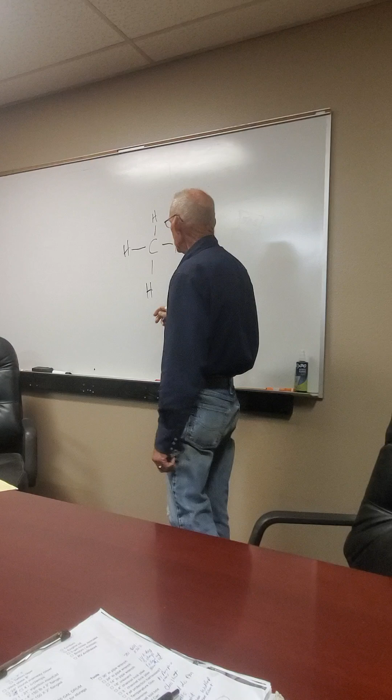Okay, atoms make up molecules, and molecules make up matter. So a methane molecule is carbon and hydrogen. Hydrocarbon is nothing more than carbon atoms and hydrogen atoms. So this right here is a methane molecule, it's made up of 5 atoms.

That's the lightest gas. So crude oil makes up molecules of lots of different types of hydrocarbon. As we get into butane - so this, in chemistry, is CH4, 1 carbon atom and 4 hydrogen atoms.

Butane, what is butane? Butane is C4H10, so it's 4 carbon atoms with 10 hydrogen atoms.

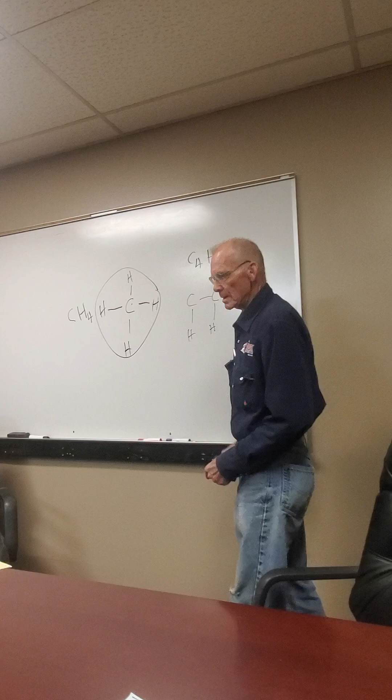Then as we get into heavier hydrocarbon, those molecules get larger, and they're made up of more carbon and more hydrogen. You get into asphalt and bitumen - I think they call it bitumen because it's a bitch.

Molecules for asphalt and bitumen are like a honeycomb. They're like a honeycomb. And they can be bonded, double bonded, and triple bonded. So the hydrogen, it's tighter. And that asphalt, the molecules get real long and large and hard to break up.

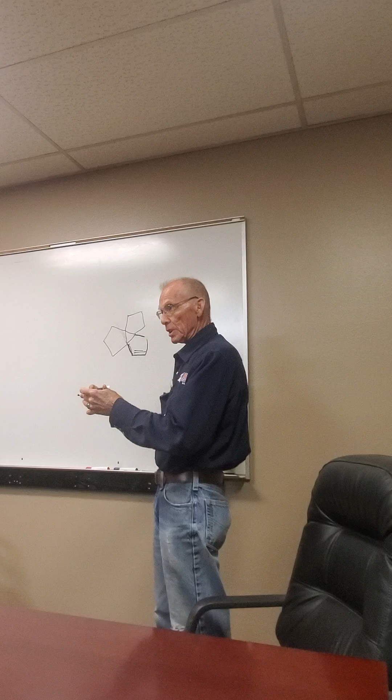We can't - this process diffuses molecules, it'll separate molecules. So you dilute them and make it easier to handle. It's like you can put the chemistry in asphalt and it'll make it more runny, like water. So it diffuses the molecules, separates the molecules. It doesn't change the molecule, it just separates them.

Because bitumen and asphalt could cover this whole board in a honeycomb, and the asphalt and bitumen has metals in it, all kinds of metals. It'll contain nitrogen, sulfur, oxygen, nickel, vanadium, rhodium - all those metals that come from deep in the earth. So that all bonds it together, bonds those molecules tightly together, and they're hard to separate, to dilute, so we can easily clean and handle it.

So that's as far as I'm gonna go on the chemistry, because now you understand that molecules of the hydrocarbons are bonded together tightly, and this process separates them to where we can handle them and get rid of them.

While you're drawing that, Ron - so what you're saying is the chemistry that you're injecting into that steam touches these chemicals and pulls them apart into little pieces that can then flow out, they just kind of melt away. Yeah, it's like...

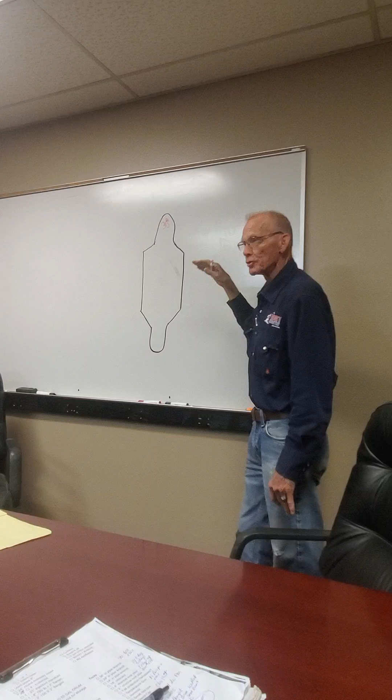And the crude oil comes into the fractionator - it's what's called the flash zone, and that's just a vapor space, there's no liquid level there, it's just an empty space at 720 degrees. Crude oil at 720 degrees enters that tower.

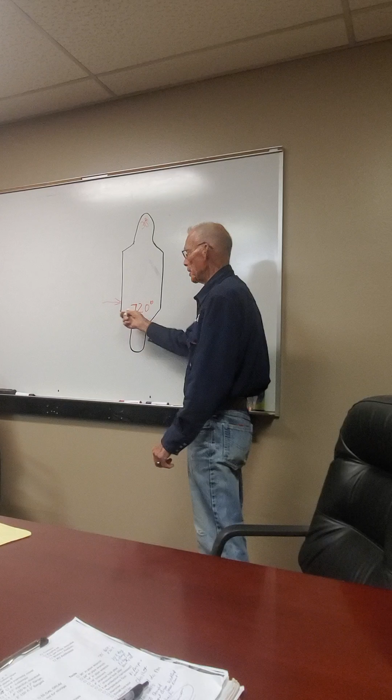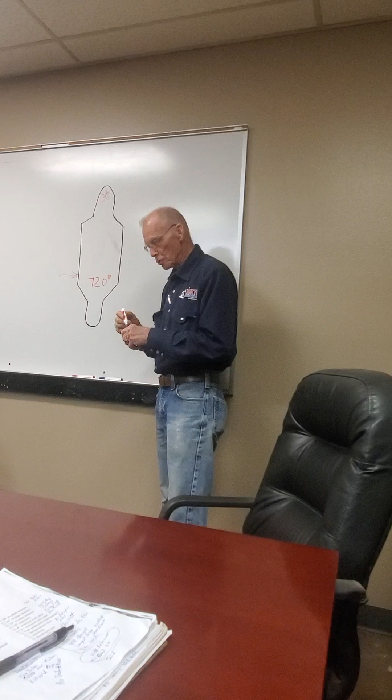That's heat and pressure, that's the key. It doesn't matter how much heat and pressure you have. Pressure creates heat. You can be pumping a hydraulic line with the valve closed on the end, and it starts getting hot. Put your hand on it, it starts getting hot. Pressure is building, and pressure creates heat.

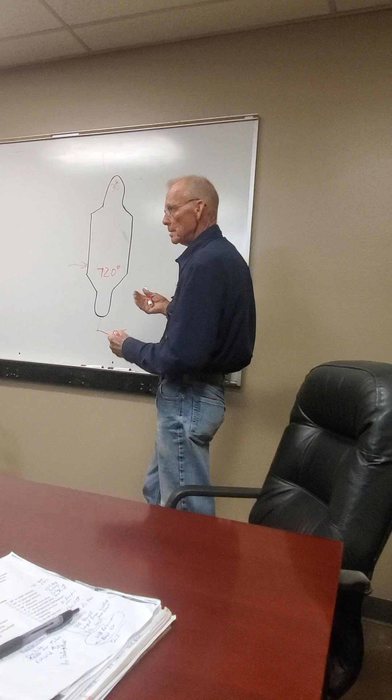So in this fractionator, out the bottom comes what's called reduced crude. It's reduced crude because the light molecules, when they hit the flash zone, rise up in that tower.

At different levels in that tower you can pull off diesel molecules, jet fuel, kerosene, and gas. Coming overhead is the gasoline. The gasoline can be broken down into other products like stabilizer and rerun, but it's gasoline. So the gasoline molecules go out the top.

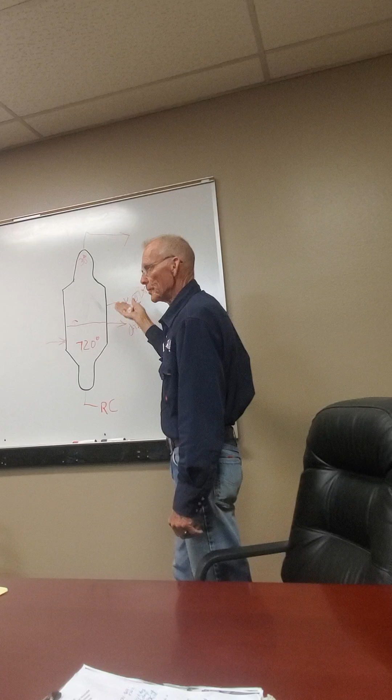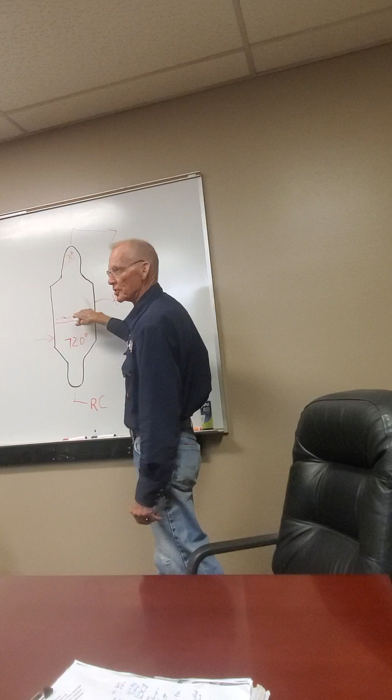The way you get these off the fractionator in liquid form, there's trays in that tower. I've seen one of these at Bismarck State College during their oil and gas program, a big glass tower with bubble trays, with separate little sections. There's a liquid level on those trays, and the gas molecules condense, turn to liquid, and you're pulling liquid off of each little tray. Lighter gases rise to the top of the fractionator tower.

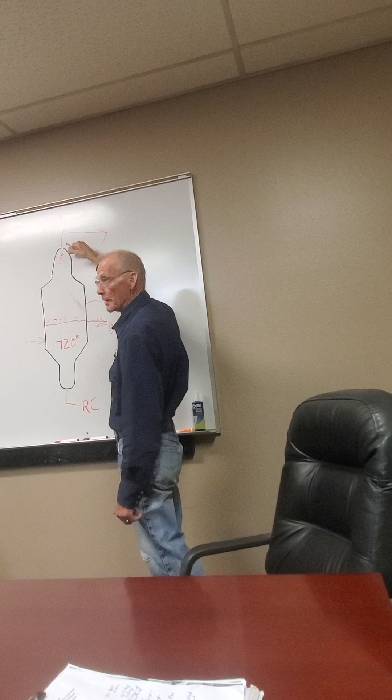We have to maintain 30 pounds of pressure to keep the heavy molecules dropping to the bottom. Which I always thought was weird, because it's easier in this process to distill this crude down to diesel, and yet diesel's way more expensive than gasoline, but it's more cost efficient and effective to make diesel than gas. But it's used commercially, so there's a markup. Anything that makes money costs more money.

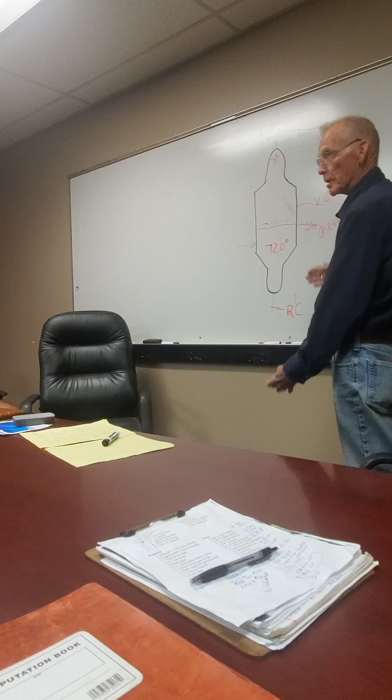So the reduced crude can be broken down further, those molecules can be diffused more. The reduced crude is fed to a vacuum tower, it's under vacuum, and the same process takes place in the vacuum tower. You just get lighter molecules out the top.

So this fractionation is actually what takes place in things like the heater treater, which we'll get to shortly.

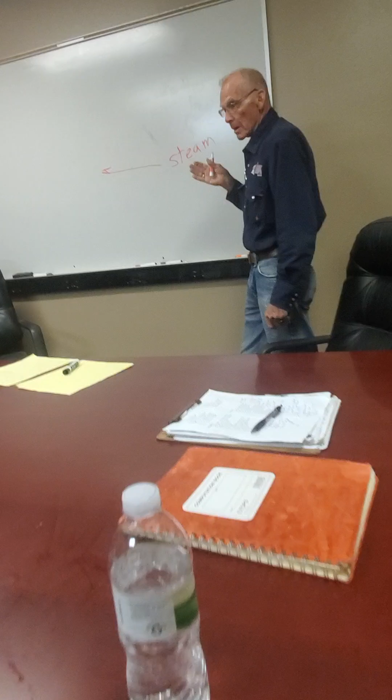Now, the process that we do: we've got steam, our steam at about 13 pounds pressure. The chemistry...

Goes through a check valve. The purpose of that check valve: because the pump injecting the chemistry just strokes about every 4 or 5 seconds, you need this check valve in there. If you didn't have it, the 13 pounds of steam pressure is going to come back into your chemical pump. So we have a check valve to prevent that.

The check valve also acts as an atomizer. So when the diaphragm pump strokes, it mists the chemistry into smaller droplets. The smaller droplets, when it hits the steam, atomize quicker and more efficiently. By atomize, you mean it breaks it up into atom-sized components. If we didn't have the check valve, you'd just have a slug of chemistry hit that steam, and it's not all going to vaporize.

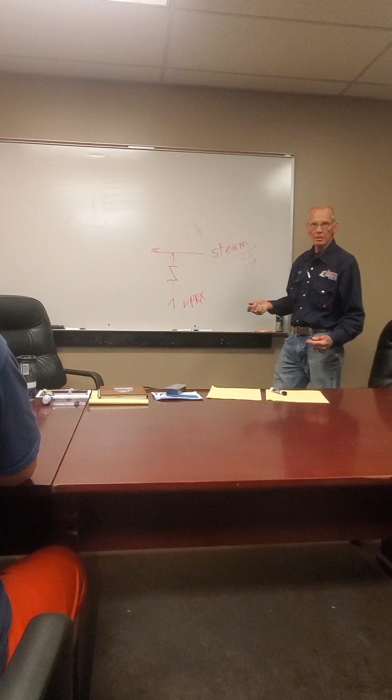It's a delivery agent. So this cleaning process, there's nothing else that can clean like this in this industry, because we have to heat. Most of this equipment is made of carbon steel. Carbon steel is the most porous, and when it's cold those pores are closed up, and they're actually filled with hydrocarbon molecules. So when we heat it up to 185 degrees, those pores open.

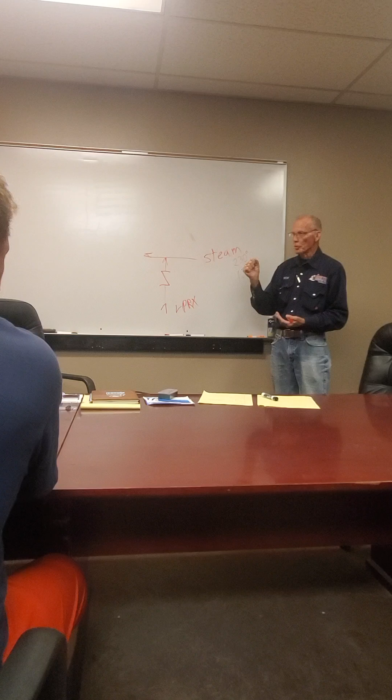And when you inject the chemistry, it cleans those pores out of the hydrocarbon. Then when the vessel cools back down, those pores close up, but they're clean, there's nothing in there. I've seen rail cars that...

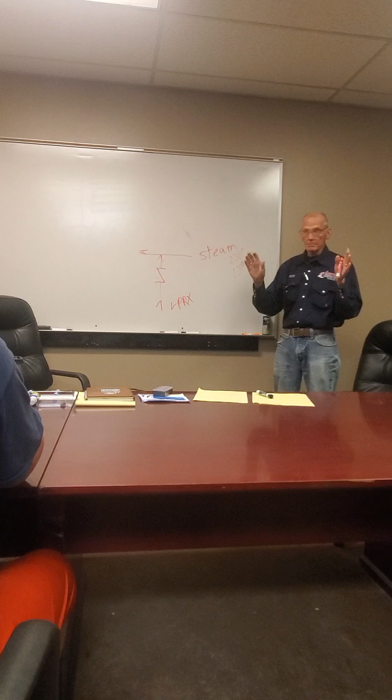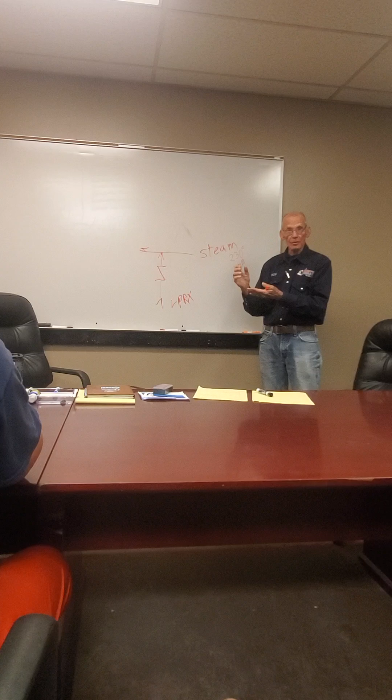They'll just do a diesel wash, a cold washing, and those pores never open. The car will pass inspection, it looks clean, and it'll sit out in a storage yard. In the summer heat, the inside of that car will heat up, and those pores will start to open and bleed that hydrocarbon, it sweats, and the car's dirty again. So this process cleans those pores out.

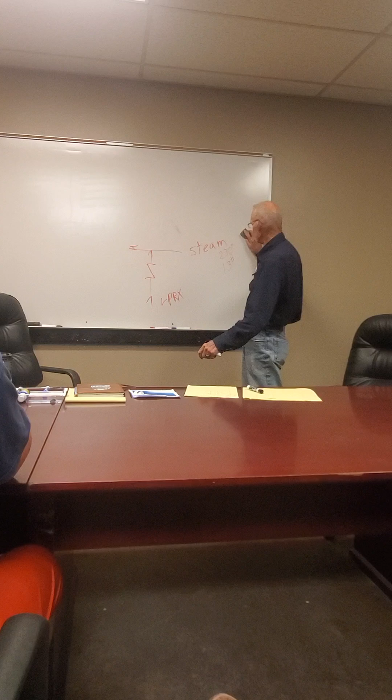Anything that gets scrapped has to have the hydrocarbons out of it. It's so bad that Rain for Rent sells their frac tanks for $500 and they'll deliver them to farmers. They turn them into water tanks and the cows are eating out of those without being cleaned. That's how desperate they are to get rid of them. $500 and we'll deliver anywhere in the state. That's how hard it is to get rid of the shit.

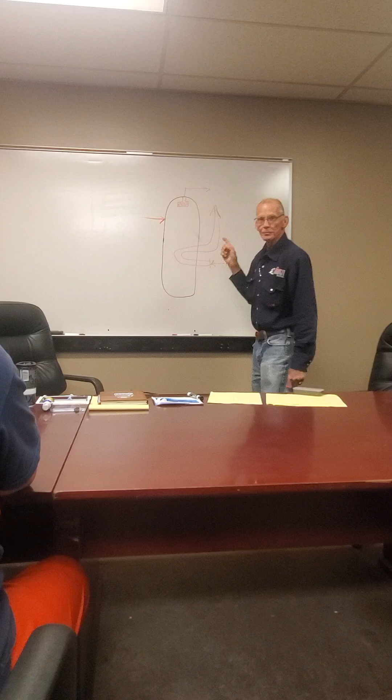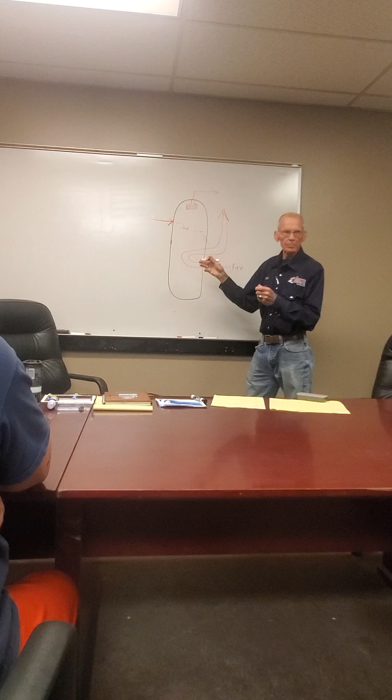Heater treaters got a fire tube that heats the oil, the emulsion. The crude oil comes into the heater treater up towards the top, spills out onto a flash pan, a tray of some sort. The heater treater, they'll run it 150 degrees to 230 degree temperature.

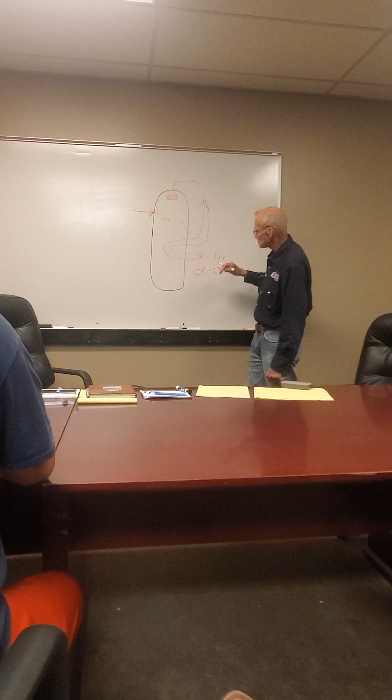So, the oil comes into the top at that temperature, there's pressure on the heater treater, probably runs 15 or 20 pounds. So that's your pressure, and this is your heat.

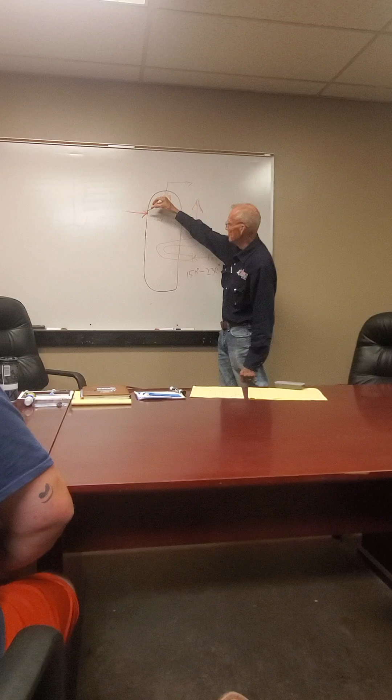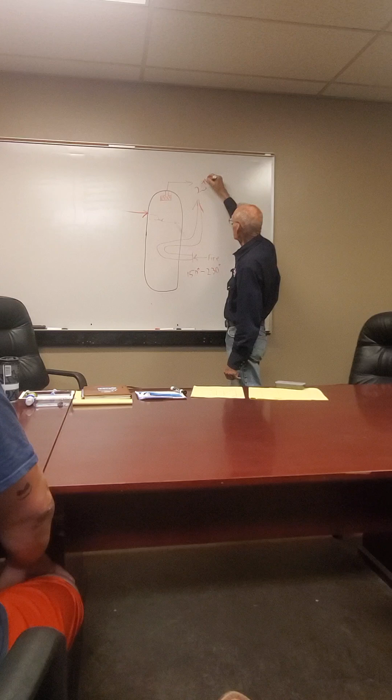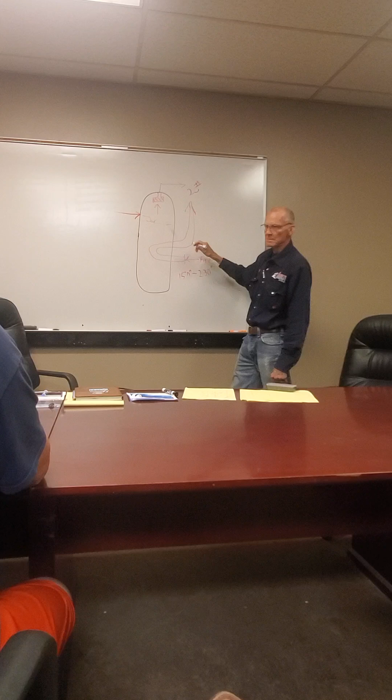So the oil comes in, it's called an emulsion because it's the water, solids, and everything's in it. Comes into the top, and that little 20 pounds of pressure in this 150 to 230 degrees lets the gas out through that screen, it's like a Brillo pad up there. And that gas actually fires the burner. They use that gas, or it'll be flared if there's too much, but it fires the burner.

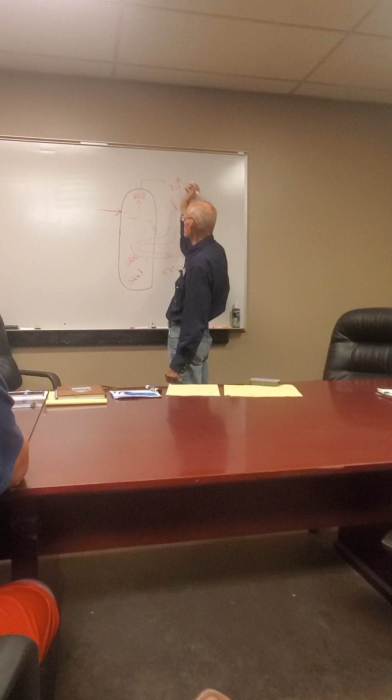And then your solids, like the sand, drop all the way to the bottom. And then you got water. And up here, the gas goes out the top. You got the good sellable oil that pulls off the tower. So it's all about heat and pressure.

Our process is the same way, heat and pressure. Goes from the wellhead straight to the treater, off the flow line. So what we do when we go in to clean those and it's full of sand, it's not going to function well because it's not heating properly, and you're not getting a proper separation. And actually that screen he has diagrammed up at the top, it works like that check valve he was talking about.

When those molecules hit it, it disperses. So it's basically their check valve, or a demister. Gotcha. And if we didn't have the check valve, we could put screens in our line and accomplish the same thing. They probably learned that in drag racing 30 years ago.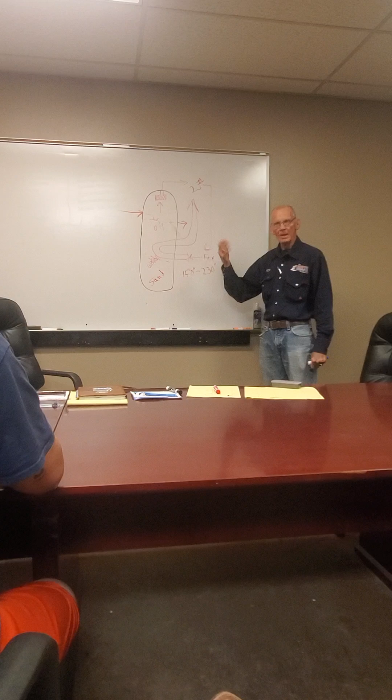So that's the whole thing in a nutshell: heat and pressure. Diffuse the molecules, we can get rid of them. That is it, simple. So it doesn't matter what you got, like the frac tanks, it doesn't matter what you got, you have to build that pressure.

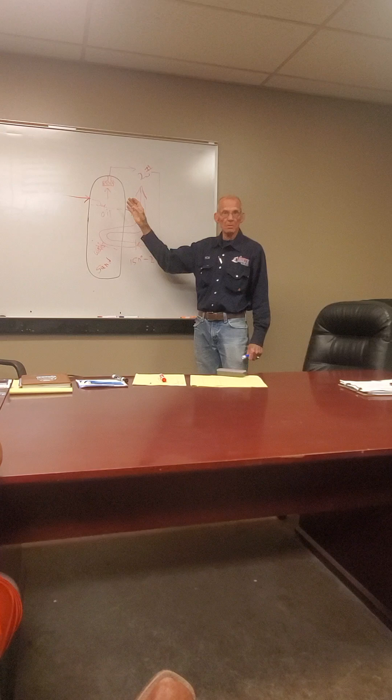Yesterday, 507 miles, yeah, that was a haul. We done two jobs. We went out to a well. They needed 2 oily frac tanks cleaned so they could put fresh water in them, used for mixing concrete. You can't have any contaminants on concrete, because that holds all your pressure on that wellhead. So they're pretty anal about that. We went out there, an hour and a half.

So if you got... we did it both at the same time, basically, 2 500-barrel frac tanks at once. And they look beautiful when you're done.

We started steam to the first one. How do you close the frac tank in so that you can build pressure in it? Do you crank down the lids? Closed it up, just close it up. Every lid on the top, and they're not sealed tight. So you don't have to vent then either, because you can just vent around the lids. Right, gotcha, just let them.

We started steaming in about 20 minutes. We had good steam out the vents on the first one, so we know we had the pressure. The pressure, us cleaning in this process, you might get 3 to 5 pounds of pressure.

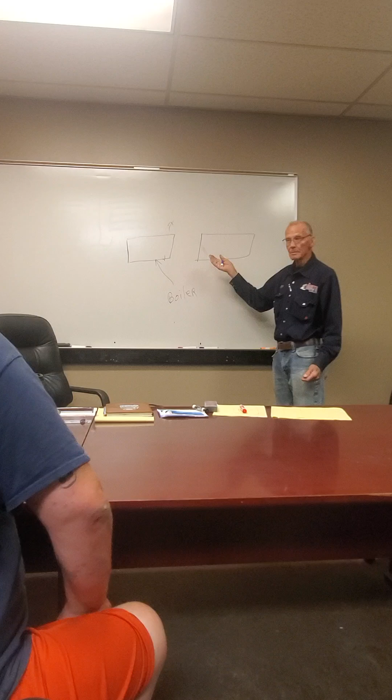That's pressure, so any solids on the wall are gonna fall to the bottom, and the oil. So as long as there's pressure, then it's okay. I know on shooters you said we're running around 13 pounds.

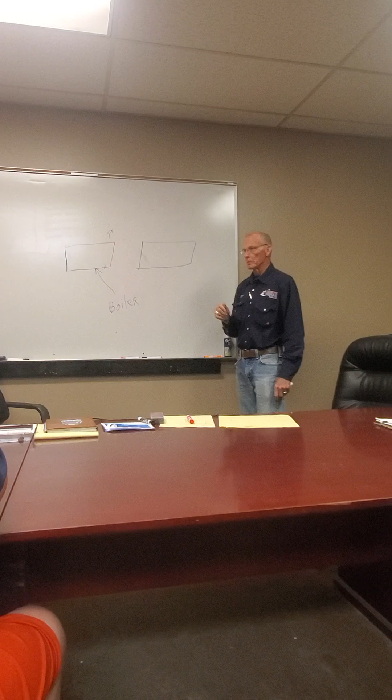Does that affect at all the time or the amount of time that we're supposed to steam that vessel for? No. How dirty the vessel is, that determines how much time it's gonna take. And then there's carbon stains - this stuff out here has never been cleaned this way before. But we get it beyond oil field cleaning. Their cleaning standards are totally different, they're really low up here.

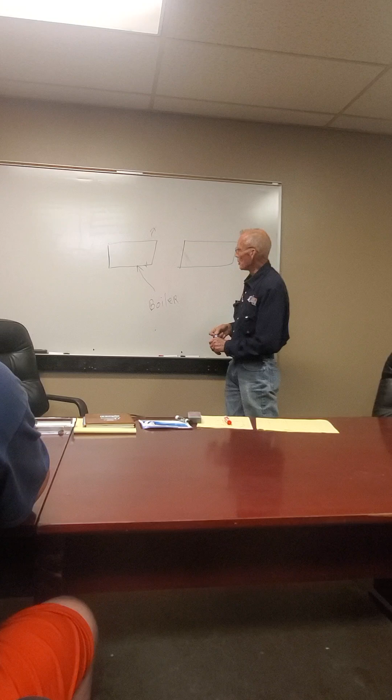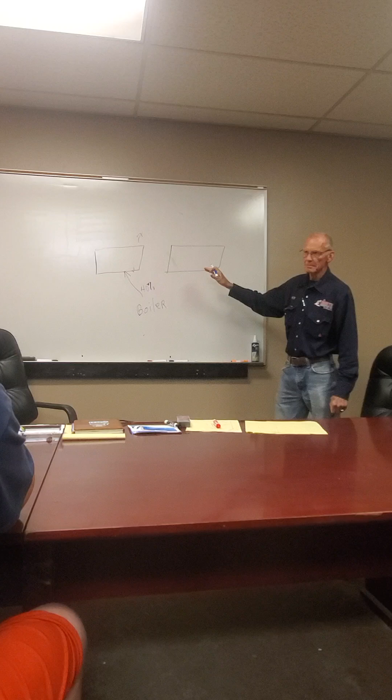Once we started, just about the time we started chemical to the first one, we had the steam valve open 40%. Ron, how do you know when to start the chemical? When you've got the temperature going, and it has to be above 170 - that's when the pores open on the steel.

I've cleaned rail cars in the wintertime that I'm only showing 160 degrees. But if you got steam rolling out the top, the inside of that vessel is at that temperature. There's an equilibrium.

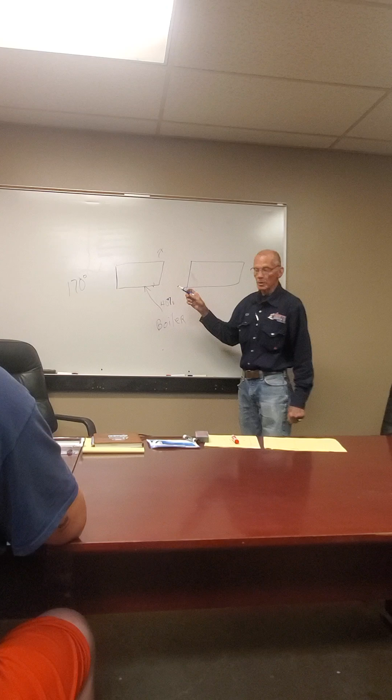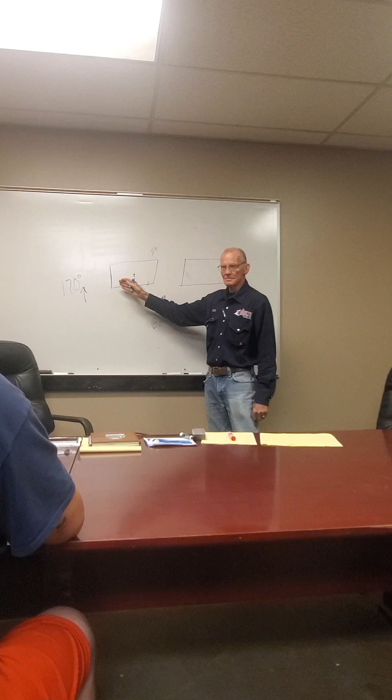There's an equilibrium in tanks, rail cars and frac tanks. There's an equilibrium inside that vapor space - it's 170 degrees. Now what that means, when you reach that 170 degrees inside what you're cleaning, the steam stops condensing. You're making water inside until you hit that 170 degrees. When you hit it, the steam stops condensing and your temperature comes right on up real quick.

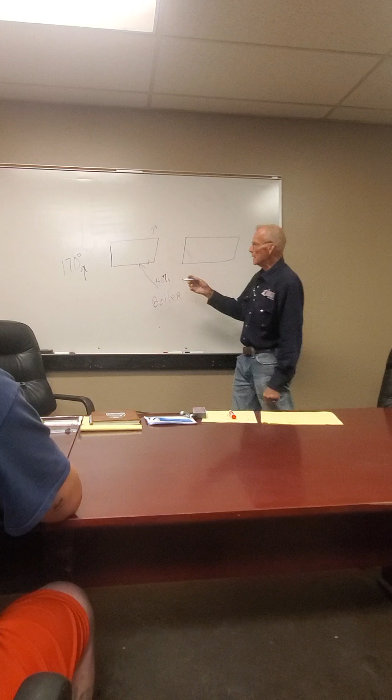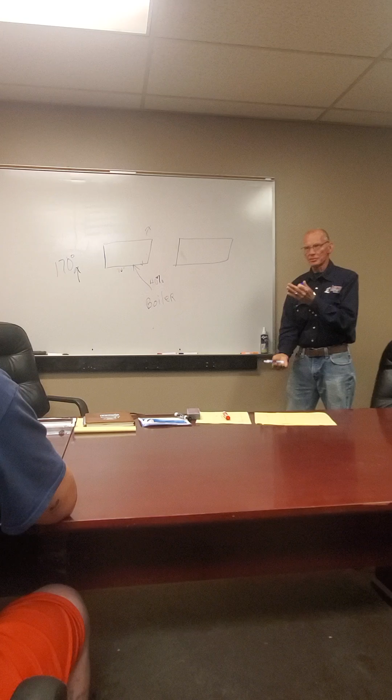So it's the amount of time it takes to get to that 170. And if you're showing 170 degrees on the outside of a frac tank or vessel, and you got steam coming out the top, you know damn well it's hotter than that inside. But when the inside reaches that 170 degrees, the steam stops condensing, and then you're ready for chemistry.

So if you're out here in the wintertime cleaning one of these, and you can't get above 170 degrees on the outside, but you got steam coming out the top, you're good to go. Okay.

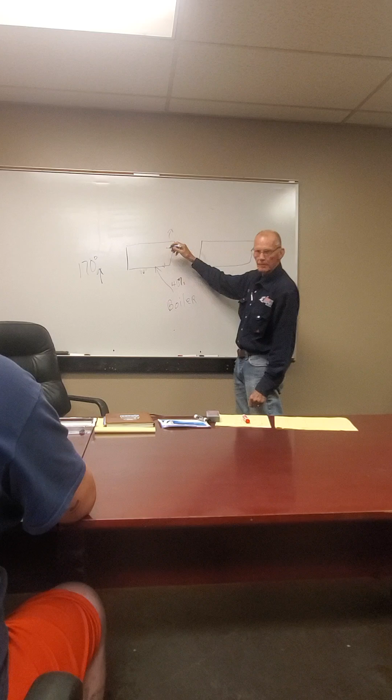So before we put the chemistry in that first frac tank yesterday, we cracked the steam valve to the second one open 20% to start heating it up. We injected the chemistry, and our temperature came up to 170 degrees on the second one, while this one was about done with the steam dwell.

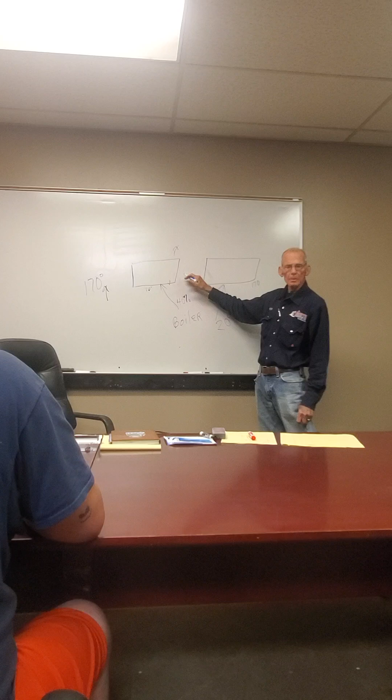I looked at my notes - we started the chemistry on this one when we shut that steam off, it was ready to go. And like on a 500 barrel tank, do we inject still 20 gallons of chemistry, or do we? We put about 15 gallons. More than likely we're using twice as much chemical as necessary, but we know on these heater treaters that 20 gallons does everything we need.

And for the cost differential of a few extra gallons of material, it's worth not having to re-steam. So even on a 500 barrel tank, because it's bigger than a heater treater, right, would 20 gallons still be sufficient? Yeah, okay.

The chemistry - 20 years ago they used to say that the chemistry encapsulates the H2S, and it really doesn't encapsulate those molecules, it surrounds them with the chemistry molecules. This chemistry is the only chemistry any chemical company sells for cleaning purposes. This is the only chemistry that's totally concentrated, has absolutely no water in it at all.

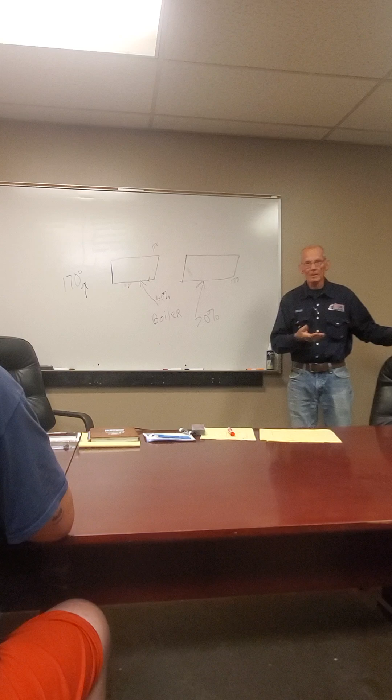So it might cost $18 a gallon, but the other chemistries sell between $10 and $12 a gallon, but it's 3/4 water. And there's clients that will buy the other chemistries - I've used the other chemistries.

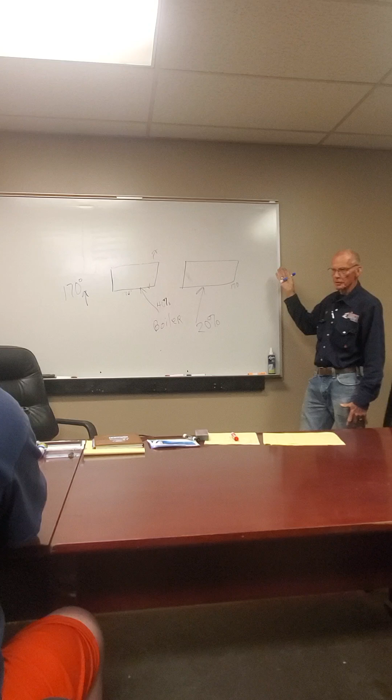So there's high concentrations of H2S that can leave pyrophorics in any vessel, and that's sulfur compounds. After you clean a vessel, it's unlikely we'll run into those high levels of H2S out here, but that sulfur is pyrophoric. The old matches used to be sulfur, stick matches.

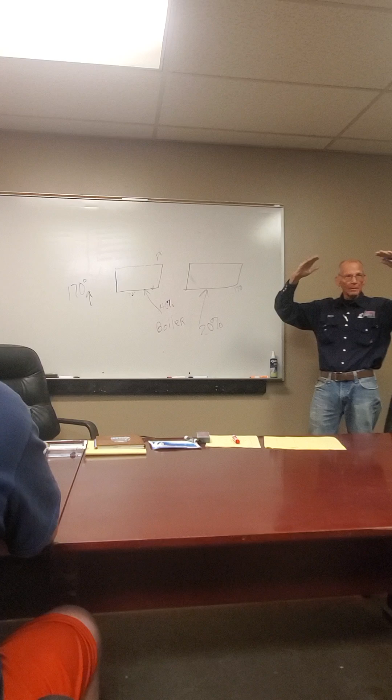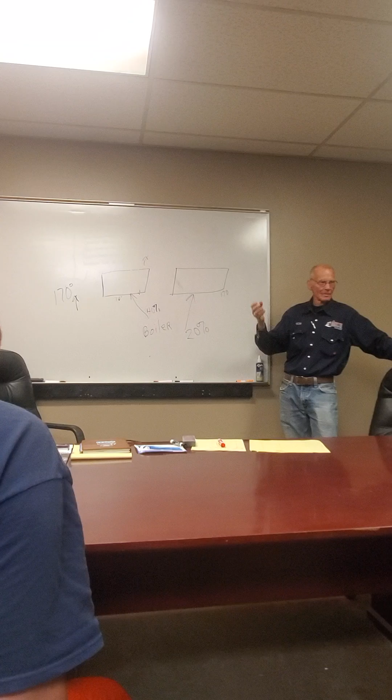So we cleaned a tank one time, and the roof rafters, the steel plates for the roof of the tank lay on top of the rafters. On top of those rafters collected these pyrophorics. We cleaned that tank and started doing maintenance on it because it tested gas-free. About day 27, we started removing the old roof plates and putting new roof plates on that tank, and it started smoldering. They got just enough oxygen to them, it auto-ignited.

So with pyrophorics, there's chemistry you can vapor phase to neutralize those pyrophorics. Is that something we need to be concerned about with what we're doing? No, because I haven't run into anybody out in these oil fields that even knows what pyrophoric is, so I doubt that we'd run into it. But it's something to look at over time on some of these tanks out here. We'll just have to keep an eye on it.

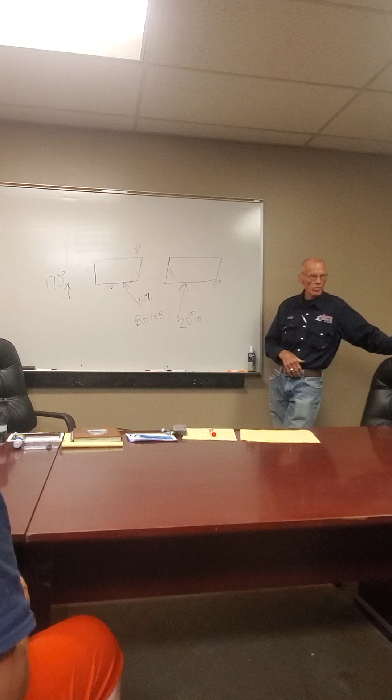Just to reiterate something you had said, actually, the Bakken has the highest H2S wells in the country. That's why we have one basin out here and nobody else does—because of how high our H2S is.

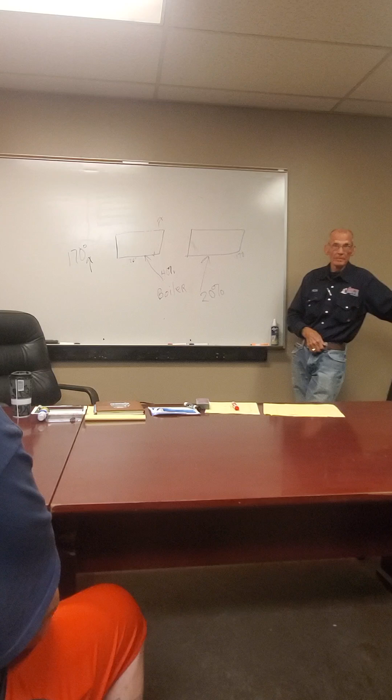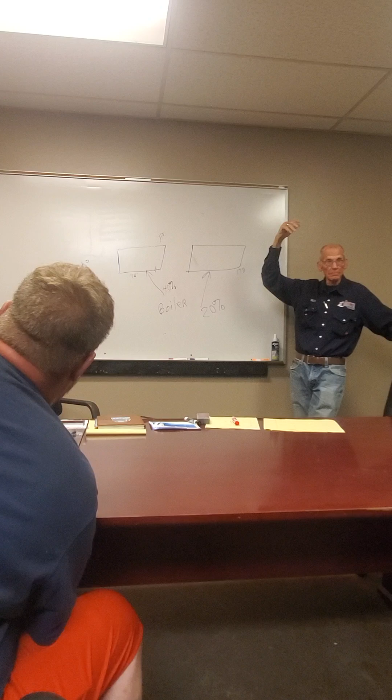So I would think, because in the refinery, the pyrophorics come from the crude oil over time. They build up in tops of equipment, even in fractionator towers. We have to neutralize them before we can open them because of pyrophorics.

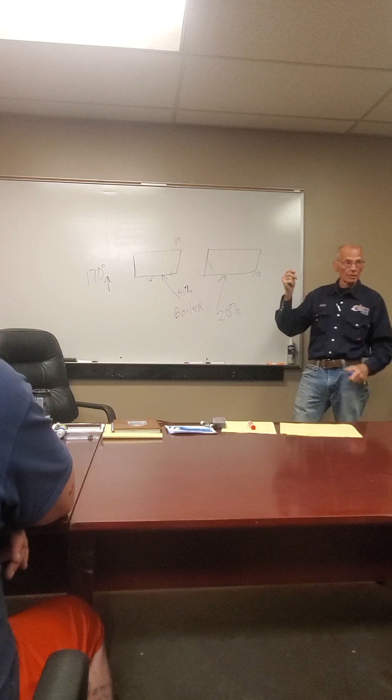Just to go back to that too, when I first moved up here, you could light your water faucet on fire. The water would burn, coming right out of your faucet. So over time it's a buildup of sulfur, H2S, and as it dries, it leaves a dry material, yellowy, and it will self-ignite.

It has an auto ignition. You know, to have a fire you've got to have your ignition source, heat, fuel, and oxygen. So if everything is just perfect, you can have a fire.

But is that a concern for us in what we're doing? I think we need to probably be asking some of these engineers—like in a gas plant, you're going to find it in a gas plant, no doubt about it. But for what we're doing with the vapor phase, with tanks like frac tanks, and I would think in some of those demisters at the top of the heater treaters, pyrophorics could build up. We're probably cleaning that out and driving the light contaminants out.

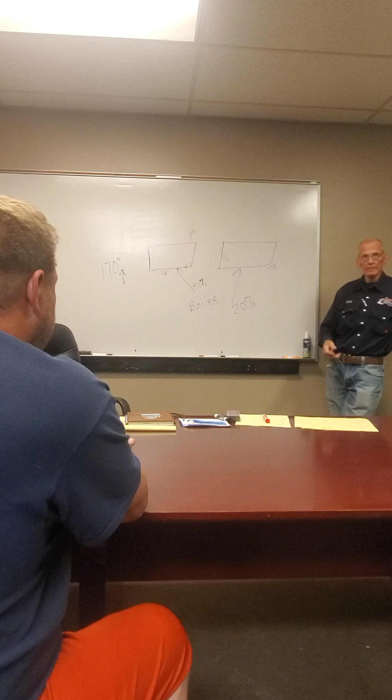Because this chemistry only affects the organic molecules of hydrocarbon. Solid sand, it'll break up—you're going to get sand on the walls. Some are on the burner tube, built-up metals and stuff. Well, this chemistry dilutes those molecules so they'll fall, but it won't dissolve solids, inorganics. But if those inorganic molecules are being held together by hydrocarbon molecules, it'll dilute the hydrocarbon molecules and let the inorganics drop to the bottom.

So the bottom line is when we get done injecting the chemistry and then steam dwell it for another period of time, anything that's left in the tank is your inorganics—your sands, your sulfurs, and your metals and those kind of things. And there's no oil mixed in with it, that's the key. So you just want to remember that on everything we clean, you have to.

We're probably going to run into things out here. Well, we had a couple of treaters last week—we were actually steaming through the oil. The manway cover, we were steaming into that manway cover, and as we started heating up, they couldn't open a vent on top. We had to open some sample tap vents on the side, and as we got up above 150 degrees temperature, that steam turned blue.

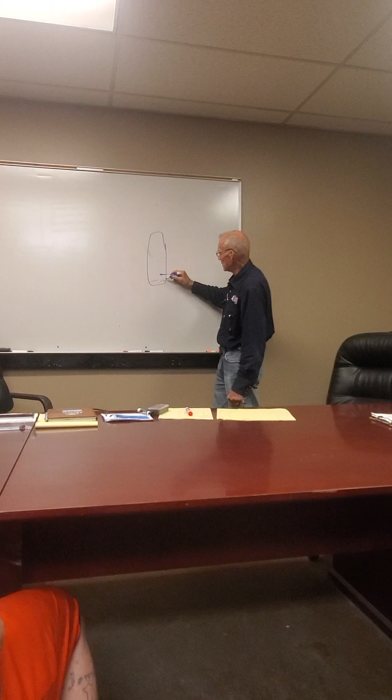Yeah, but you want to be sure that your steam, whatever you're steaming, is in a vapor space, out of the liquid.

So if it's not like that, then what do you do? You suck it out. We've done that too. If they're really dirty, after the first steam we'll suck it out, and then if you start seeing that blue smoke coming out, you know you've got stuff you got to pull out of the bottom of it. Or if they're really dirty, we pull it out too, because the steam will still roll across the top and carry it out.

You watch that steam vapor, it'll tell you what's going on inside. Even when you start injecting the chemistry, that steam cloud will reduce a little bit, because the chemistry going in there is wetting it up and cleaning. Then when you shut the chemistry off and watch that steam cloud, it'll lighten up. The chemistry makes it a little more white.

When you shut the chemistry off, the purpose of the steam dwell is you use up the chemistry that's inside and burn it out. It actually carries the lighter contaminants out with it.

But that's not something we need to be concerned with health-wise. If there's lighter contaminants in this VPRX, it's not bad for our respiratory system or anything like that. It's the safest chemistry out there, but it'll take your breath away.